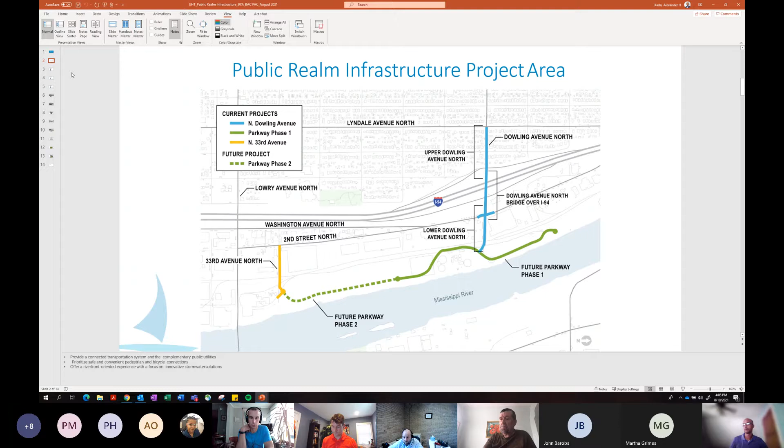We've done quite a bit of engagement. We did our first round of engagement in January 2021, and have been doing engagement on this project with CPED for a number of years, starting with the Above the Falls Master Plan. We've hosted a variety of open houses and events, and I'm sure many of you have been involved in some of those in some capacity.

To really highlight what we've heard from engagement when it comes to infrastructure, it's really just prioritizing bicycle and pedestrian movements. Obviously Dowling, getting over I-94 is quite a challenge, and so we were really tasked with how do we really accommodate non-motorist users across the bridge and then into the site. Also, we were able to work on some of the public art pieces as well, and did a lot of coordination with the forecourt around the park as well. So it's just a really exciting project.

This is just the concerns. Congestion was also an issue that was voiced by some folks, as well as bike ped safety. Just going to keep moving through to show you Upper Dowling. This is just a few more suggestions around improving art, improving the public realm, providing these more just as an FYI for folks. So we're just going to hop into Dowling.

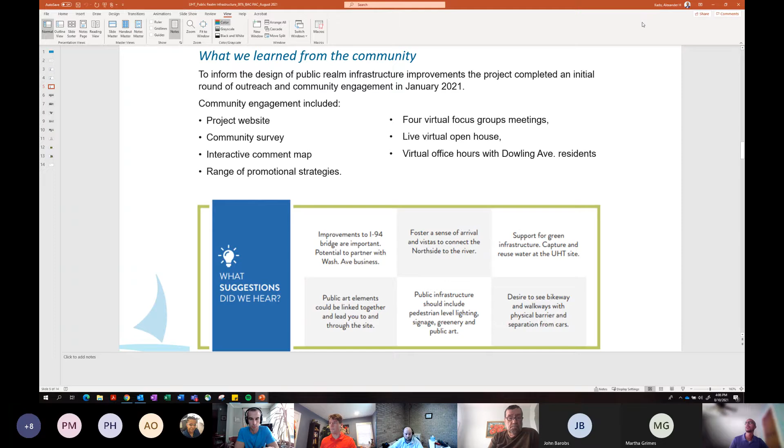So this is Upper Dowling. We call it Upper Dowling because it's at a higher elevation. This is on the western side of the bridge. You can see this is Lyndale Avenue North right here, and this is 6th Street North, right before I-94. I always get these confused, one of these is 4th and one of these is 6th, I always flip them around, so my apologies. One interesting thing to note, this was not even in the scope of the UHT project.

When Nathan and I got on board, we did some analysis and realized that, obviously Dowling being the primary access point, this area of Dowling didn't have the best pavement condition, had on-street bike lanes, no boulevard, sidewalk back to curb, so just a lot of room for improvement. So we added it to the scope for this project, and we're glad we did.

Further west of here, we're planning to put this into our CIP in future years. This treatment with the shared use path on the south side will likely extend all the way to Theodore Wirth Park. That's further along in the CIP, but the design treatment we're doing here is done with the intention of a long-term plan for how this area will look and how folks will travel to and from the site. So on the south side, we have a shared use path, 10 feet.

On the north side, we have a 6-foot sidewalk. We were really constrained with the space we had. We wanted to definitely provide separated facilities for cyclists because as of now, it's a bike lane on the street. This is a high volume street, 15,000 vehicles a day, and a bike lane on the street is just not our go-to design standard moving forward. So we went with the shared use path to facilitate those movements, understanding we still have a very constrained right of way.

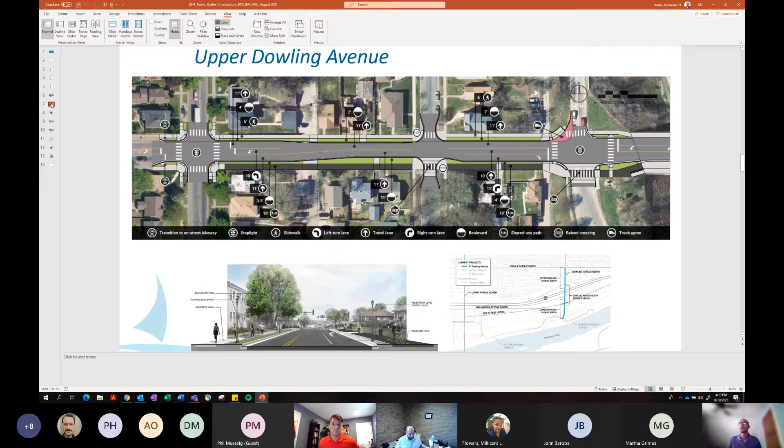And then we're going to have adjacent to that a 7-foot sidewalk that's existing, and then to the north, we'll have that 7-foot sidewalk. So this is a section where the bike and pedestrian facilities are separated because we have the space to accommodate that. This facility transition continues pretty much all the way into the site. Once we get to this intersection crossing, there's another raised crossing, some green marking for motorists, and then you'll see that continuation of the separated sidewalk and the separated two-way cycle track.

A few other things to note here. We did quite a bit of reskewing of the intersection to organize it a little better. If you've been out to that area before, you can see the vehicle lane alignments and the intersection in general is a little problematic, and the crossing distances are a little tricky. So we are realigning that intersection to aid in movement for all users: motorists, cyclists, pedestrians, etc.

We're also adding in some north and south bike facilities. These will connect into the Webber Camden 44 project further north, which I believe begins construction next year. To the south, we have the cycle facility that'll extend into 2nd Street north. I know I went really quick, so I'll give space to the rest of my team if they have any comments on this piece.

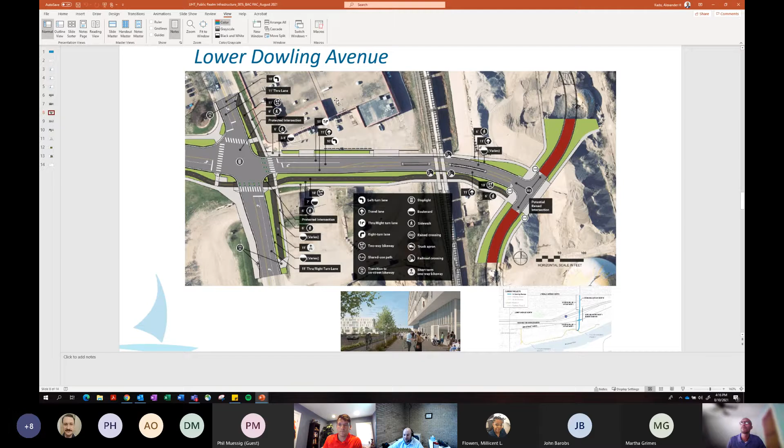Yeah, the goal with the raised intersection - you don't see it on this drawing, but envision a park on the other side of that intersection. We want to convey some design continuity into that park and show that this is all connected, make it feel more linear. The idea with the raised intersection is to make that entire area walkable and be kind of a gateway into the park - that's the design intent.

Nathan, anything else to add, or Ahmed, before I go to the next slide?

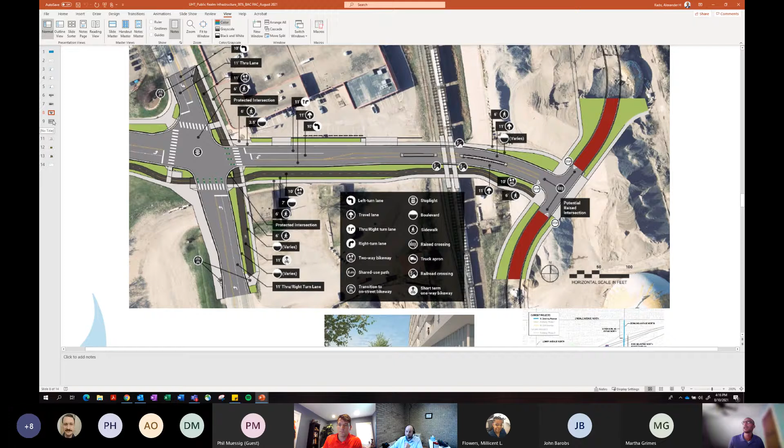Let's keep cruising through. In the packets this is actually the next slide, but I'm going to skip this one and go to the Parkway, then come back to 33rd from a logical standpoint. This is where Chris was talking about that raised intersection.

You'll see phase 1 of the UHT Parkway in red. I realize this color is a little darker than the parkways typically are, but just know that the parkway will have that red granite chip seal you're familiar with around the city. It'll travel north and end in a cul-de-sac.

This is where parcels 1A and 1B will be, that's a private development. The park will be here, the music concert venue will be here, and some of the other developments will be here as well.

You can still see the bike and ped facilities continuing north and south along the parkway. These are 10-foot travel lanes, a 10 to 12-foot two-way bike facility. There will be some parking in these little cutout sections along the parkway, in line with how the park board typically designs their parking facilities on the parkway. It's still a minimum of parking.

We do understand there's a need to provide access to all types of modes and users, but we are being respectful and trying to prioritize bikes and peds.

Along the parkway, this is a visualization, but it kind of shows you the priority. Pedestrians have the really nice views, followed by cyclists rolling along, and the motorists are a bit further away, as you see the vehicle driving there. So it really does show that prioritization of the parkway.

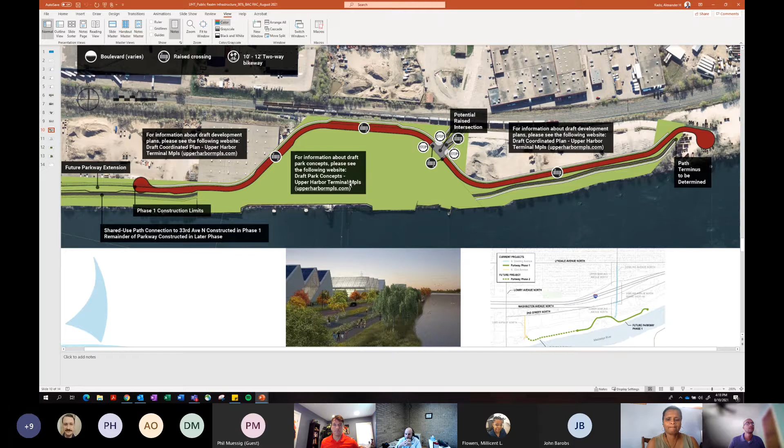I'm going to the next slide, which is 33rd Avenue. So this is 33rd Avenue.

We went to the BAC and PAC, I think it was in April, but I don't know—my perspective of time is a little foggy with this last year of COVID and whatnot. But we came to the PAC and BAC with two concepts because we were very space constrained in this area.

One concept had a wider shared use path on the north with some boulevard, but did not have a sidewalk. The BAC and PAC were pretty unanimous that a sidewalk on the south side was essentially a requirement, wanting pedestrian facilities on both sides of the road.

So we went back to the drawing board, worked things out with the design team, engaged with the stakeholders here, which are heavy to light industrial manufacturers, and were able to add in the sidewalk on the south side. The width varies, but at a minimum meets that 6-foot pedestrian path, plus a few extra feet for signage and lighting.

To the north, we do have the shared use path at 10 feet. Both of these connect into the roundabout. We have two 10-foot travel lanes and an 8-foot median. The 8-foot median is a new addition on 33rd.

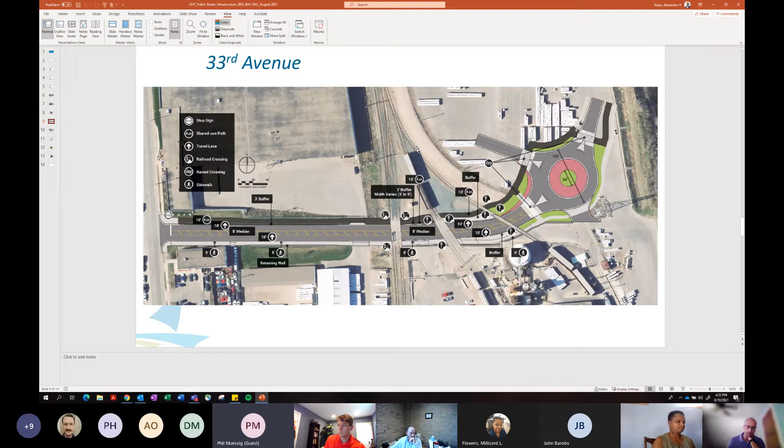I remember this is back to Upper Dowling. So it's a 10-foot shared use path on the south side of Dowling with the divider in the middle. Is that the plan?

Are you talking about Upper Dowling or the bridge, Bill? Way west of the west. Dowling as far west as the project goes over to Lyndale. Yeah, so this would be a 10-foot shared use path.

I'm not certain, Nathan, where we're at now on striping. Are we centerline striping the shared use paths, or are we just leaving them unmarked? I know there's been a bit of back and forth on what our new policy around that is. Yeah, we'd have to double check with traffic because we are looking at best practices from not only locally, but regionally and across the country for how to best design and stripe these. Currently on the Johnson project in Northeast that's being built as a shared use path, we're taking the approach of having it signed with biking and walking signage at the gateway to each block. We'd be looking at that on this project too, but just have to confirm that detail with our traffic staff. As of now, we'd be looking to have signage as compared to striping.

Oh, okay. I know there's been some discussion about just a dashed line in the middle, knowing that bicyclists obviously are going to range over across the striping, but signage, I've seen it certainly work too, definitely.

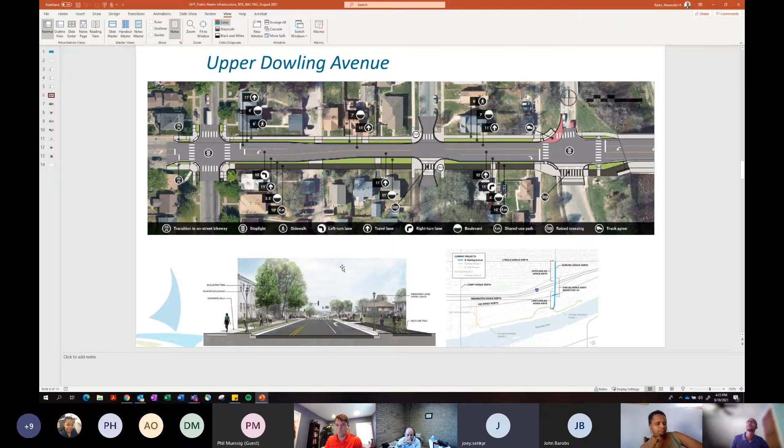Anyone else with any questions? Joey? Yeah, I had a question about Washington Avenue there, right on the east side of the 94 bridge. It looked like there is a... sorry, let me get it for a second, no problem.

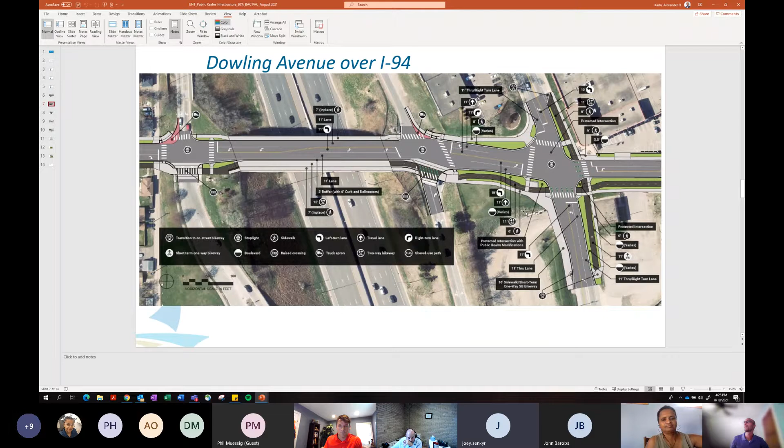So it looks like there's a two-way bike lane continuing north on Washington, and it's only separated for a little bit. Would that then be painted as a two-way, even just paint protected all the way up to where Washington crosses 94 again, or is there going to be a rough transition for southbound bikers?

The intent would be to have striping and delineators up to the Lyndale 41st intersection. We'd likely be doing a seal coat project to get rid of any lane scarring for the striping. We did do a change order with Hennepin County on the Webber 44 project. In the previous layout, they had it transitioning to directional on-street lanes at Lyndale and 41st.

But for those of you familiar with that project that went through this committee a couple of years ago, it will now stay on the west side of Lyndale at 41st as a two-way bikeway, come around the corner on the bridge and then tie into this project. So there will now be a continuous path once this project is done from Dowling, I think 9 miles, connecting all the way into Brooklyn Center. So we found this as a really great short-term win to connect more people to Upper Harbor as well as greater North Minneapolis.

That sounds great. Thank you. That is awesome. Anybody else with any questions? Okay, so guys, I'm not seeing anybody else with their hand up.

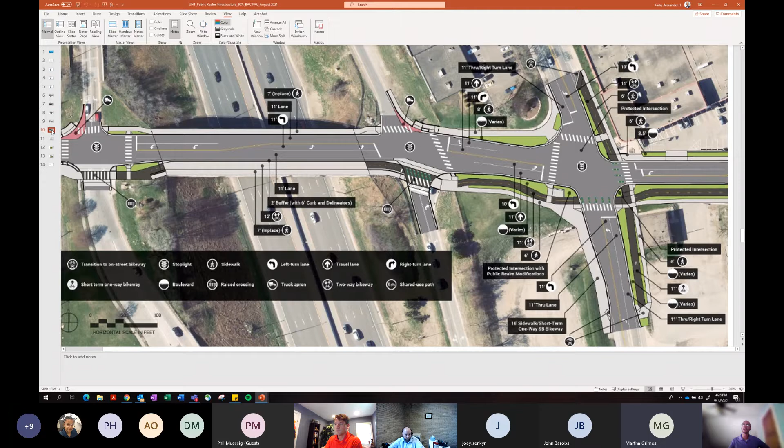So there are a lot of pieces to Upper Harbor Terminal. One of the most critical ones is the green stormwater infrastructure component. We've been designing and working around what that will be for this site, and we've done a lot of work with the Mississippi Watershed Management Organization, the Park Board, and also private development to reach a district system to help clean, treat, and potentially reuse runoff from the site.

This is a 50-acre site, and we are using the water to infiltrate into the underground before it enters the Mississippi River. Some of the water here may receive a higher level of treatment than others. We're still exploring that, but we are proposing a district system within here, which includes a variety of treatments.

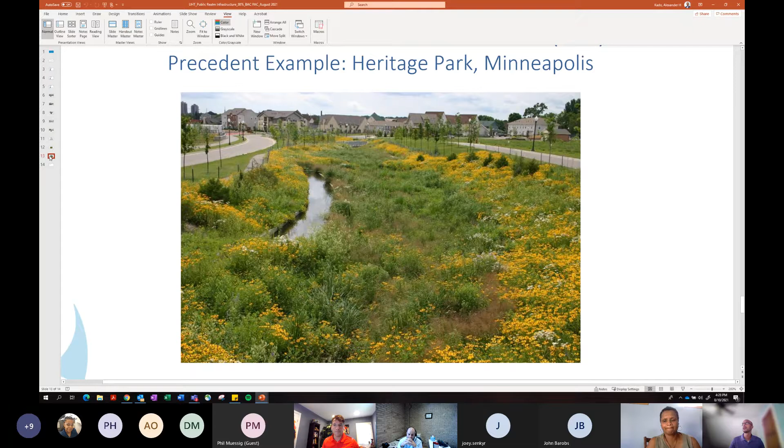From a surface level, you will likely see things more like this. This is Heritage Park in Minneapolis, on the edge of North Minneapolis. This is the Stormwater Plaza at 8th Street and Riverside Avenue. So these are the types of things that you would likely see as a visitor to the site, adjacent to the right-of-way, with a variety of different treatments.

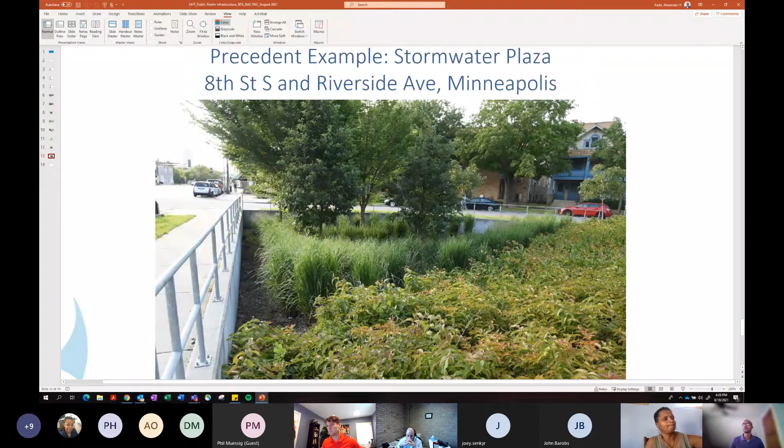So the takeaway for this group is just knowing that there's going to be a district-wide stormwater system to treat the stormwater runoff. It's still in the design stages. We've been working with MWMO, the Park Board, and private development to really deliver a really exciting system for the public.

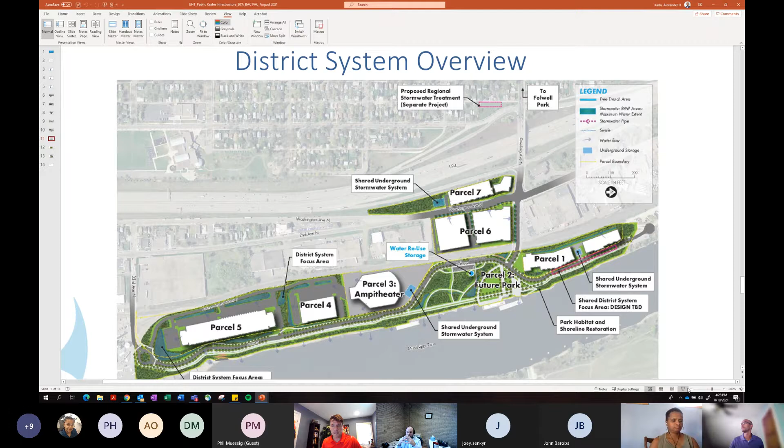So this is a really innovative public-private partnership through a combination of easements and design to more holistically treat stormwater in the area. As Alexander said, 50 acres. The only local precedent we have of something like this would be in the Towerside district over by the U of M. This is a very strong collaboration where we're able to combine private water, park board water, and city water, and better utilize the space so we can have more greening and fit more in this area.

We aim to achieve a combined goal of improved water quality when it does go into the Mississippi, and potentially using it for on-site irrigation or other things. Typically this is a pretty detailed element that follows through before construction, but we thought it was such an innovative idea that this group would be interested in understanding how that comes together for a cohesive design and aesthetic for the broader site, while advancing a lot of environmental goals that we have for Upper Harbor and the city as a whole.

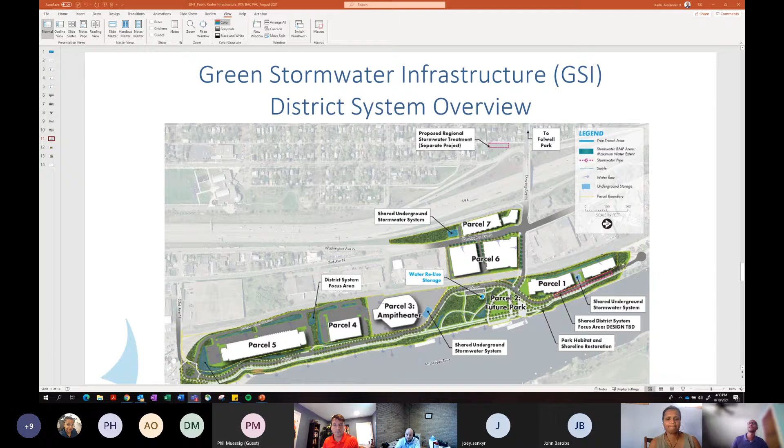To conclude, round 2 engagement is starting this month. We have an open house on August 24th, Tuesday. We're targeting layout approval in October, and construction starting in 2023. The infrastructure construction will start in 2023, and private development will likely start shortly after that and continue for the following years. So two years from now, you'll start seeing a lot of activity in that area.

So are you guys planning on coming back to talk to us again, or is this our only visit?

This is it. This is our 30%. We're going to be using our round 2 engagement and the open house to get additional feedback and incorporate any additional tweaks into the design, but we are not anticipating to return to this group unless there's significant changes.

Okay, Dan Miller? Yep, hi. Going back to the Dowling Avenue over 94 photo there, or illustration, just a question regarding MnDOT and what they're doing with 252.

I'm not sure how far they're going down, but is MnDOT involved at all with any of these improvements on Dowling? They're a project partner, but given the current timeline for the environmental review on 252/94, they haven't advanced any new bridge or design elements that would currently impact what we're planning here.

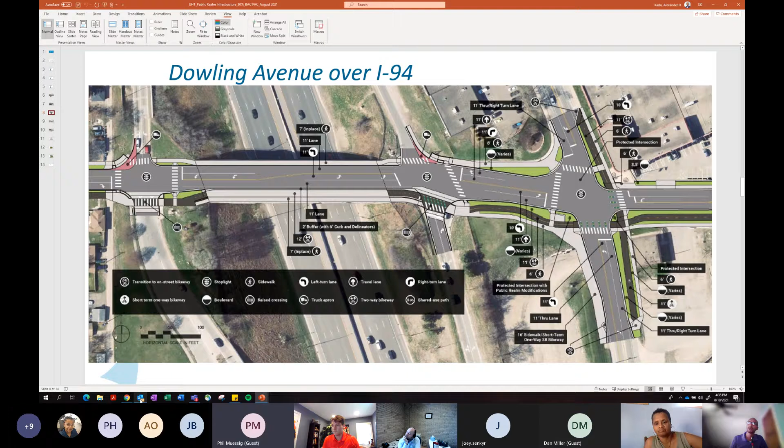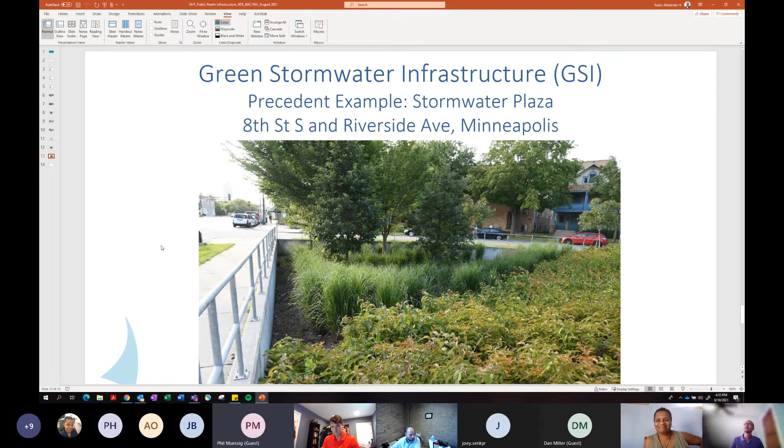Yeah, speaking of the green infrastructure work, I just wanted to compliment you all, the city, on that 8th Riverside Avenue to 8th Street storage facility for water, quite significant. It took a couple of years to really grow out. I passed it pretty much every week, and over the first two years it looked a little rangy and scruffy, and you wondered if these trees were going to live. As the picture shows, it's really come along well, and it stores a heck of a lot of water for a big rainfall, and that's one of the predictions we'll see with these larger rain events. So this was a great example, and it appears to be working well from my biking past it.

We're using a lot of those same folks that were involved in the design of that system with this situation at Upper Harbor Terminal. So we're really excited, and I'm glad you enjoyed that and are optimistic about what will happen at the UHT site.

Well, unless there's someone else, I want to thank you. Great presentation, and thank you for having the PED and the bikers involved in the planning, and the watershed is all coming together. So thank you.

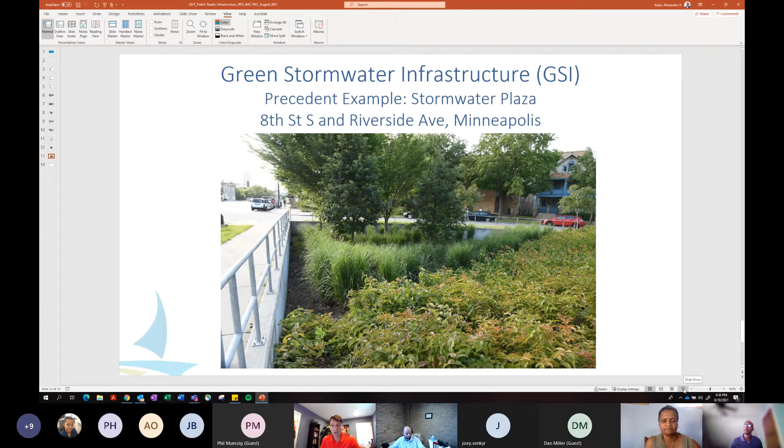Any more questions? I would just say that we are looking for layout approval in October, so it would be very helpful for our team if we got a resolution of support for the project in advance of TPW in October.

Okay, Dan, can you help me with the resolution part? Is that something we do after? Yeah, I think that's something we can draft. Is there anybody that would like to work on drafting a resolution? Say something now, or Marty and myself can start to put some stuff together for the general meeting. Okay, it looks like it's you and I. Okay, thank you, that was wonderful.

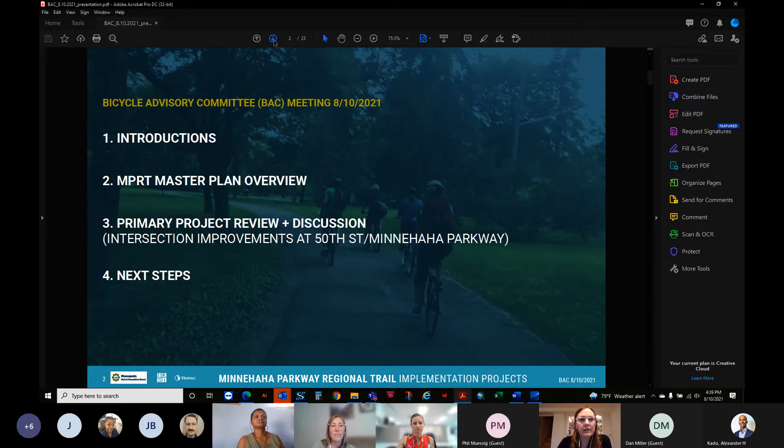Minnehaha Parkway Regional Trail underwent a master planning process beginning in 2018, and that master plan process spanned about 2 years and culminated in the adoption by the Park Board in November of 2020. We had a very robust community engagement process.

Throughout that time, we engaged with the Community Advisory Committee, had a dozen meetings with them, quite a few open houses, a number of MPRB in-houses, an interactive web survey, quite a few meetings on site in the neighborhood, and the Park Board also led quite a few outings with youth groups through the other parks in the city throughout Minnehaha Parkway.

The plan was adopted in November 2020, and right now we are in the implementation process phase. We anticipate the horizon for this master plan to be 20 to 30 years. We knew going into the master plan process that there would be some funding available at the completion of the project to do some initial projects.

And so that is what we are working on right now: identifying and scoping, and then working on the design for some of these initial projects.

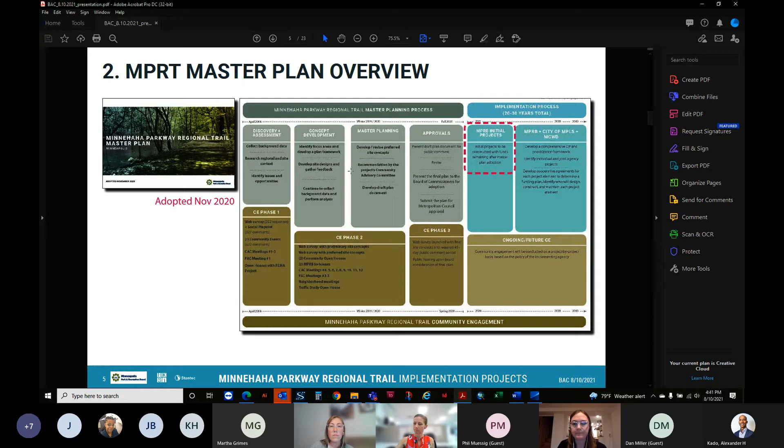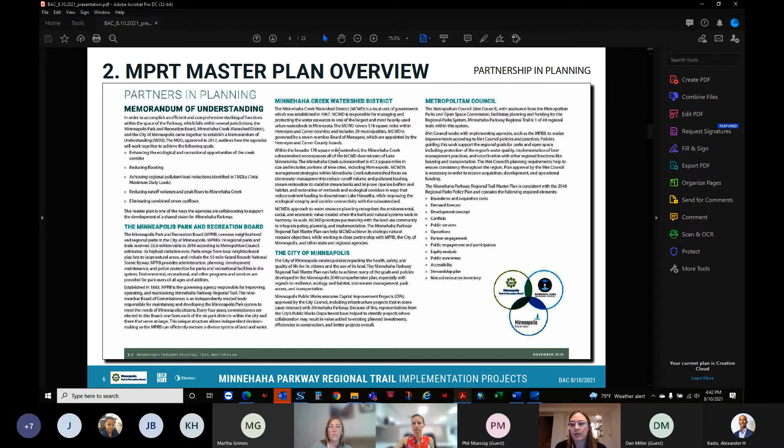With the master plan process, there were three entities that had a lot of involvement - not just the Park Board, but also the City of Minneapolis and Minnehaha Creek Watershed District. There was an MOU signed at the beginning of the project, acknowledging that the three partner organizations would be engaged throughout the planning process and through implementation, trying to identify projects that can be completed together and in cooperation with each other.

I'm sure most of you are pretty familiar with Minnehaha Parkway and the trail system. The master plan study area was divided into 4 segments so that we could organize the space a little bit and talk about it within these segments. You'll notice that the study area did not include the segment of the parkway that crosses through Hiawatha and Nokomis.

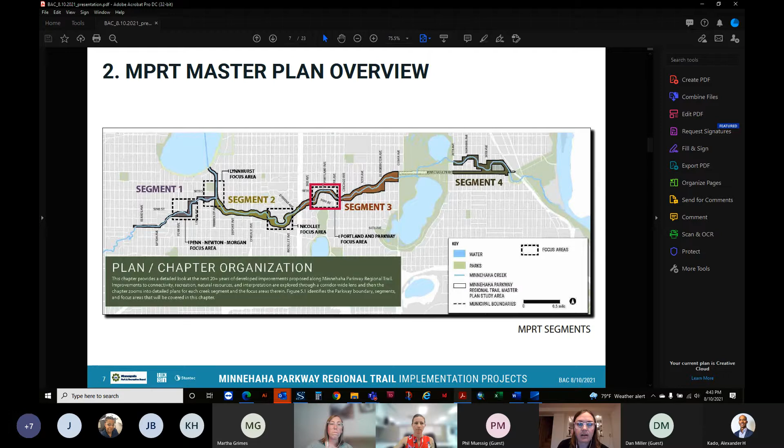This is because these parks were master planned in 2015, I believe that plan was completed. So that portion of the parkway already had recommendations, and some of those have been implemented already. Today, we're going to focus on the recommendations gathered in segment 3, around Portland Avenue, Park Avenue, and 50th Street.

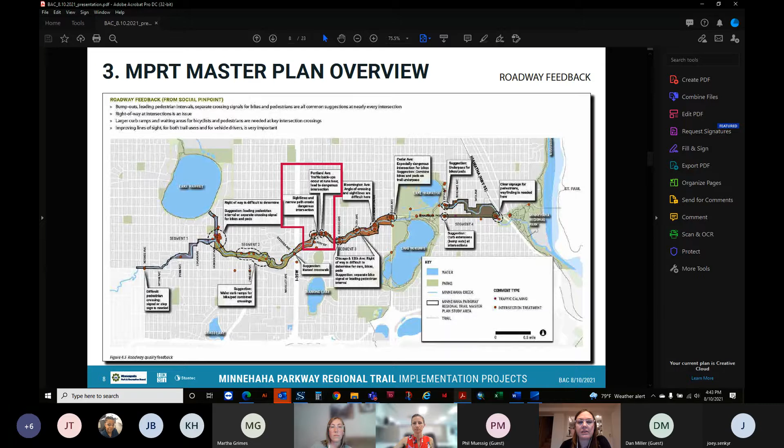About 2/3 or 3/4 of the way through the master planning process, it seemed apparent that we needed to take a little pause and address some of the issues coming up through engagement and with our CAC regarding traffic and some of the recommendations throughout the parkway. So we put a pause on the master plan process and commissioned a traffic study with Stantec in 2019.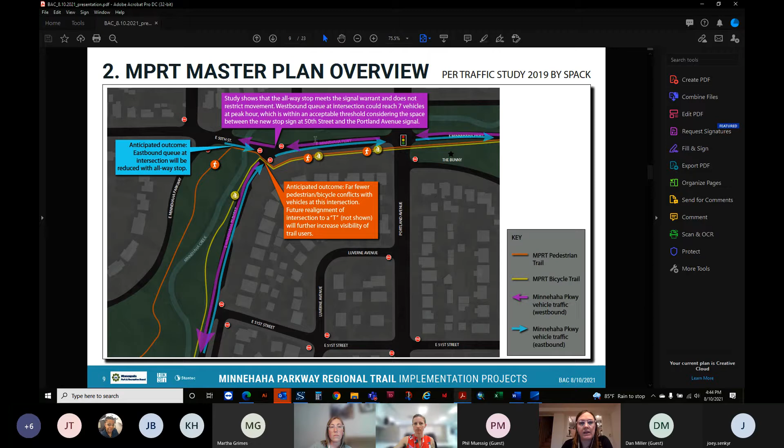This is a diagram of the master plan focus area recommendations for this area. You can see our primary project area is one of many recommendations that came out of the planning process. With the Community Advisory Committee and MPRB staff and community feedback, we identified this intersection as the highest priority.

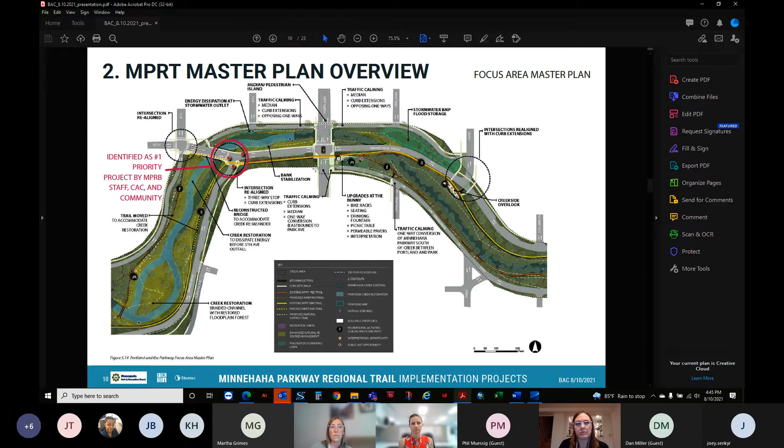For immediate implementation throughout the entire creek corridor, some other projects that might become part of this scope, depending on funding availability, include one-way conversion along the north leg of Minnehaha Parkway, potential upgrades around the bunny sculpture, and medians to restrict some turning movements around the trails.

Now I'm going to go a little more in depth with the primary project. Just a project schedule: right now we are at the 30% review with you all. We'll be meeting with the Pedestrian Advisory Committee next week, and the following week we'll be reviewing with the CPTF group with the city of Minneapolis.

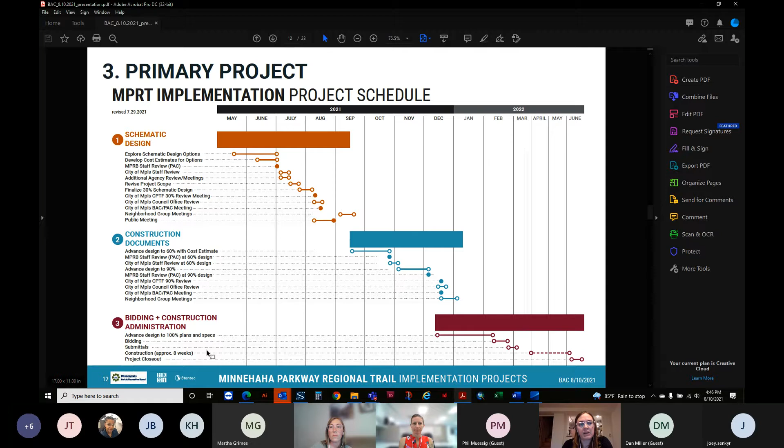We'll be doing community engagement with neighborhood groups, taking all the feedback and working on construction documents, planning to return to the Bicycle Advisory Committee at 90%. Then looking to do bidding and construction administration through 2022.

I threw in a couple slides here for reference if we need to come back to them in our discussion. This is the project area, aerial view, 50th Street, Minnehaha Parkway. This is actually mislabeled from Google, but this is also Minnehaha Parkway, and this is the north leg of Minnehaha Parkway.

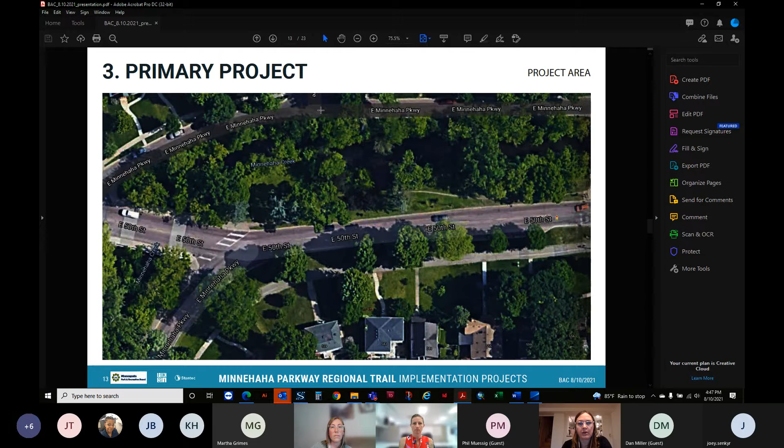Street view, you can see there's quite a bit of traffic at this intersection. There's a sign today that says 'signal your turn.' This is a pretty confusing intersection for most users—drivers, pedestrians, and bicyclists. The trail crossing is back here, and for drivers, it's not clear that they'll be crossing a trail as soon as they get past this intersection.

There are some other issues we're looking at alongside the primary project area, including erosion issues and potentially adding a sidewalk along the north side of the parkway.

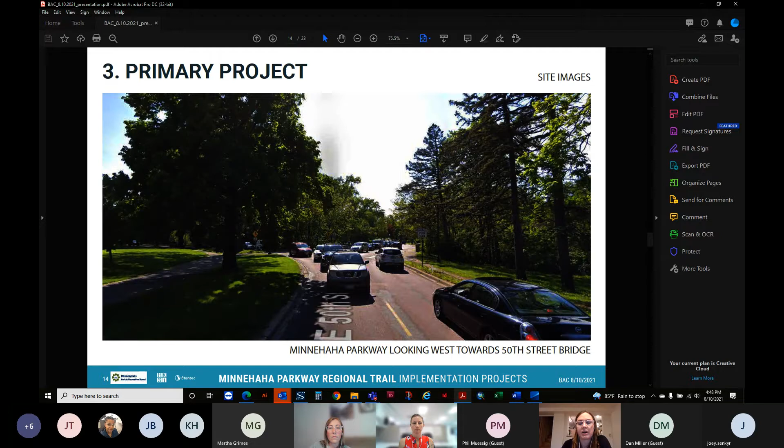Here's another view of that intersection. The shared use trail is here, then crosses the roadway, and the trail actually splits—bikers go south and pedestrians continue across the bridge and go south along the parkway on the other side of the creek.

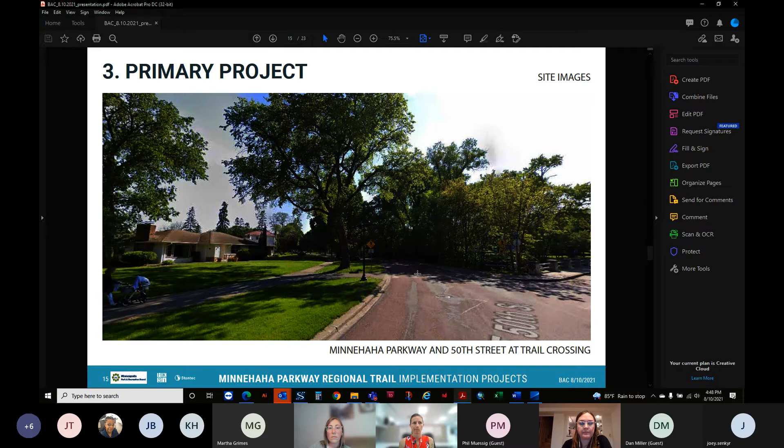Another view a little further south along Minnehaha Parkway from that intersection. You can see the bike trail is right at the back of the curb along the roadway. Some trees have made the path narrowed here and not very consistent, and there's sidewalk on the east side of the road.

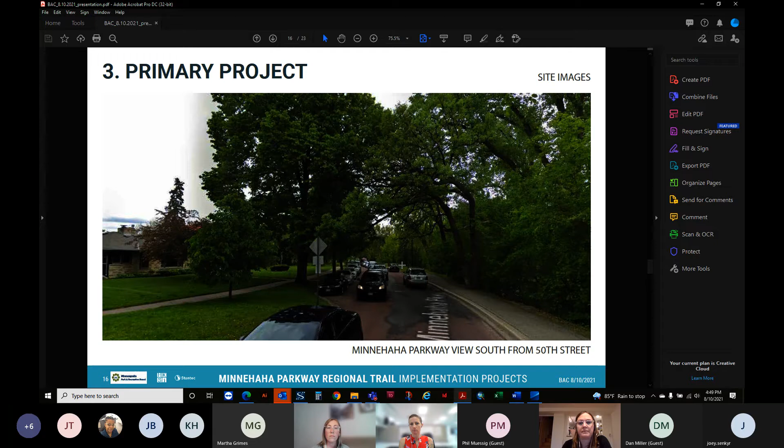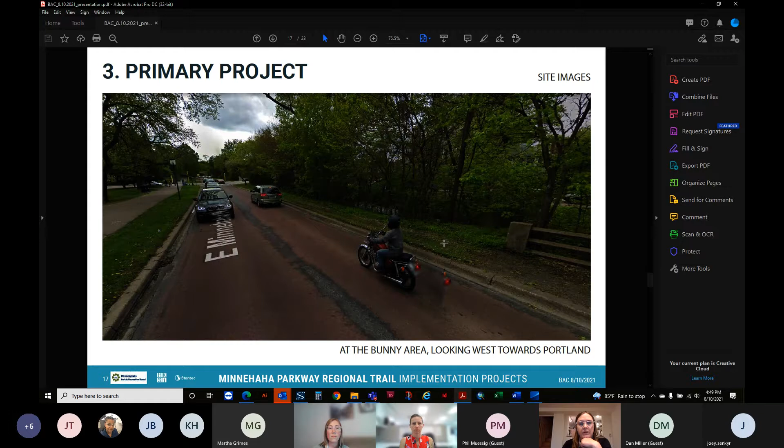One more photo, maybe for reference later, but this is a bit further east from the project area, closer to the Bunny, showing the Parkway Trail along the south side of the road, and on the north side there's kind of a goat path, but no sidewalk today.

So the primary project goals: improve visibility of trail users, improve safety of trail users at the intersection, especially at 50th and the Parkway, and address legibility of the intersection for drivers.

Some of the components we are looking at: realigning the south leg of the intersection to a T, designed for a future three-way stop controlled intersection, and expanding the pedestrian curb ramp areas at the crosswalks. We know this is one of the most heavily used trails in the park system, and maybe even in the city, with quite a bit of volume of pedestrians and bicyclists waiting at the intersection to cross.

Upgrading crosswalk markings—we want to use green and white multimodal continental style crosswalk markings. We'll also be looking at widening the trail segments to match the master plan recommendations for the parkway, increasing to a 12-foot minimum for shared use trails, 14 preferred, and a 10-foot minimum for the bicycle trail.

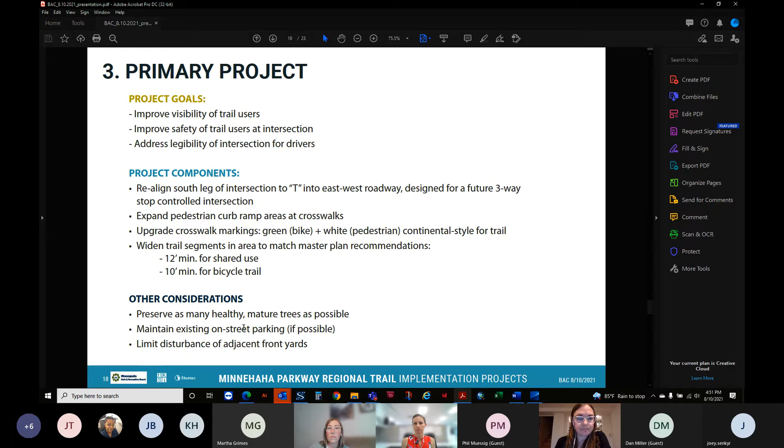Some other considerations factoring into the design: we want to preserve as many healthy, mature trees as possible, maintain existing on-street parking where we can, and limit disturbance of adjacent front yards. This is one section of Minnehaha Parkway where the trail is directly in front of people's homes. So this is the existing project area.

As you can see, the shared use trail is here and then crosses right at the curve of Minnehaha Parkway. The bicycle trail continues south. Pedestrians cross the bridge, and this is the pedestrian trail.

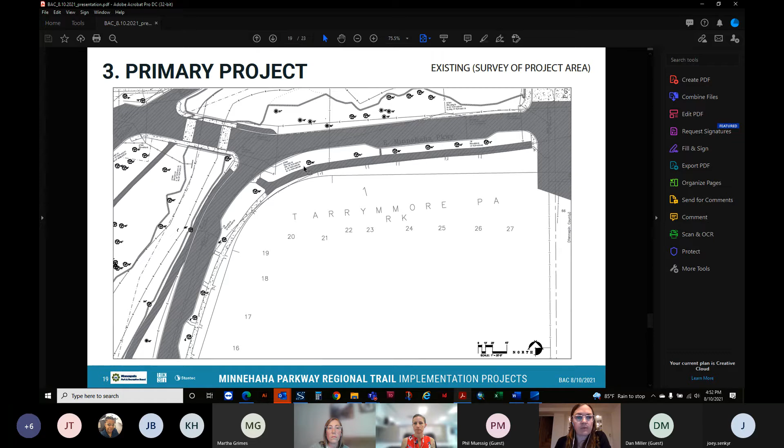The geometry today of the roadway is not conducive to communicating to drivers that they need to stop and yield for pedestrians and bicyclists at this crossing, which is the biggest design move we're looking at. So we are looking at teeing up this intersection, realigning the south leg so that it meets the intersection as close to a 90-degree angle as possible.

We are limited a little bit with the geometry because of this existing 50th Street bridge, so we're a bit constrained here. The bridge abutments start right where my cursor is, so we can't push the realignment too much further to the west. This line here is the right of way for the parkway.

We're looking at expanding those curb ramps, adding better crosswalk markings, and trying to make this trail width consistent along the shared use trail. Along with the realignment of the roadway, we're hoping to make the bike trail along the south leg also a consistent width and provide some separation from the roadway here.

Right now we're looking at constraints with the existing tree locations, trying to figure out if we can do all of this work without removing any trees. That probably isn't possible, and right now, with the assistance of MPRB staff, we're taking a closer look at some of those trees.

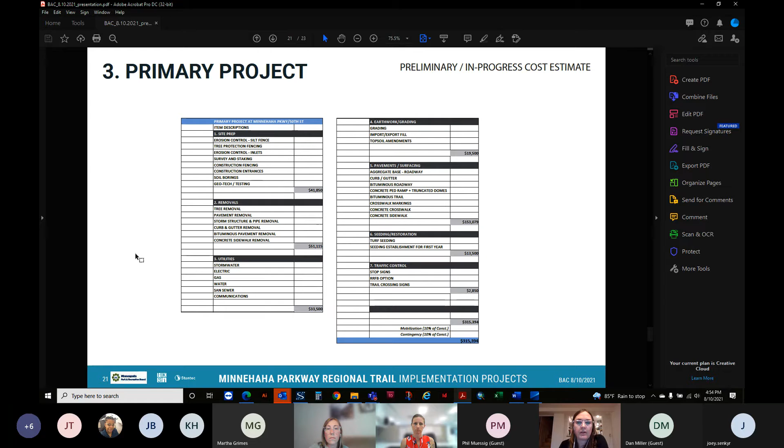I think that's most of what we're looking at in this primary project area. We are working through a preliminary cost estimate right now. As I mentioned, some of these issues—tree preservation, tree removal, trail widening, on-street parking—I think today what we'd be looking for are any recommendations or preferred facilities we should be exploring further in depth in this area.

For next steps, this meeting was actually rescheduled. The CPTF meeting will be on the 23rd. Today we're meeting with you all. The Bicycle Advisory Committee will be meeting with the Pedestrian Advisory Committee next week, and then in September we'll be working through the engagement process with the neighborhood groups.

As I mentioned earlier, there was a pretty robust engagement process to identify the project through the master planning process, identifying more specific facilities and recommendations in this area than most of the other areas within the master plan study. So we feel fairly confident in the general scope of the project as far as engagement goes, but we'll be working through informing the neighborhood groups about the details of the project in September.

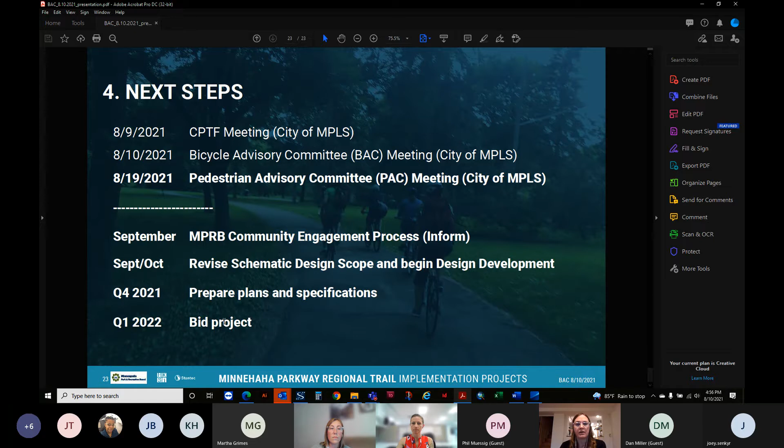We'll be revising that schematic design and scope, then working through design development later in the fall, preparing plans and specs this winter, and then looking to bid the project in spring or winter of 2022. So that is the project in a nutshell.

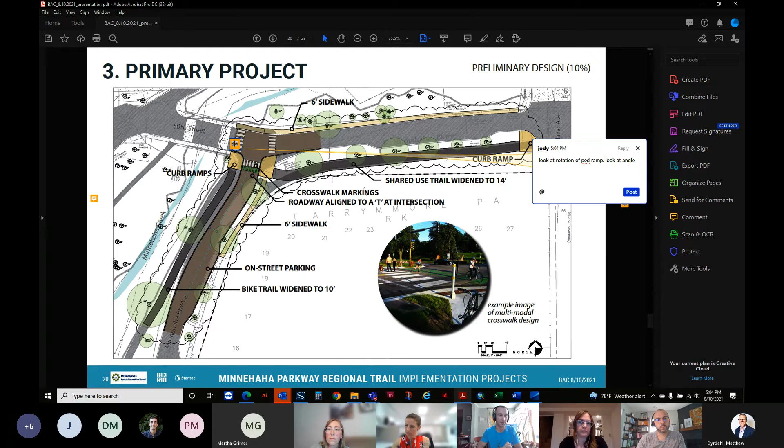So the other thing I was thinking about was at that curb ramp on the southwest corner. My first comment might negate this, but I'm trying to figure out a way to rotate that bike path intersection with the corner a bit, rather than it being a direct 90-degree angle, which could be tough for someone in motion on a bicycle. Just seeing if there's some way to get a little decrease in that angle.

But otherwise, I'm excited to see this change, because as a frequent rider, there's a lot of uncertainty when you're going to cross that street on the bike path. So it's good to see this change. Thank you, yeah, I agree.

Philip here. It's great to see these suggested improvements, because people come along at a pretty good clip, and then all of a sudden there are pedestrians, and you're wondering, should I go across the bridge or use the goat path? If you're a pedestrian, I can see why you're suggesting a sidewalk on the north side, Minnehaha, but signage and wayfinding, and probably some slowing down of bikes as they get to this intersection. Some physical cues would be really helpful, because I can remember times feeling like, whoa, I better stop, because pedestrians have stopped to look around and figure out what to do, or bicyclists with a trailer aren't sure what to do. So it is confusing. I'm almost imagining a big map, a kiosk, but it doesn't warrant that much. Signage and wayfinding will be part of the visual cues.

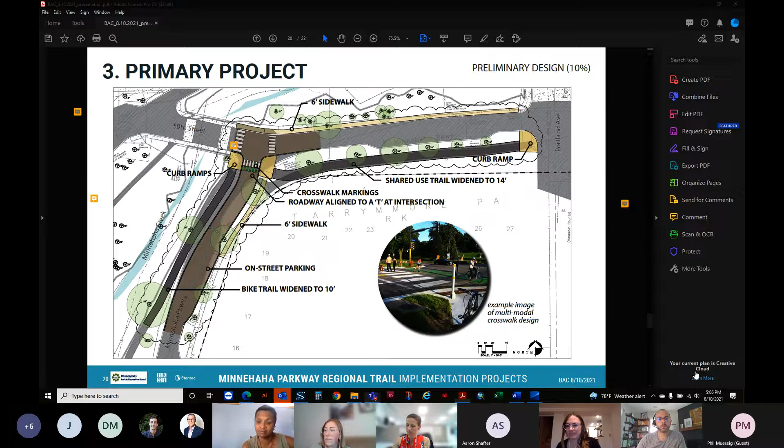Hello everyone, my name is Amber Blanchard. I'm the project director for the Stone Arch Repair Project with MnDOT Metro District. So let me get the presentation going. Can you all hear me okay? Yes. Awesome, thanks for the head nod, Jesse.

All right, I've got a short presentation here covering the repair plans for this. We're meeting with you all today, and then next week we're meeting with the Pedestrian Advisory Committee. So let me just get into this.

So we've got a great project team working on this, with several offices and people representing MnDOT, including the Metro District, the Cultural Resource Unit here at MnDOT since the bridge is historic, the Bridge Office, and an architectural historian through MacDonald and Mack Architects included in our project team. The Bridge Engineer is LHB Incorporated, based out of Duluth, and they've done a lot of bridge repair work and design for MnDOT over the years.

The work types on this repair project include full repointing of the masonry and mortar on the structure, covering the entire bridge, all faces and underneath the arch spans as well. We're going to be doing some repairs to the minor stone cracking we're seeing in some locations, and we are going to replace severely deteriorated stone. It's not that much in the full context of the entire bridge, but a small percentage has deteriorated quite a bit that we will be looking to replace.

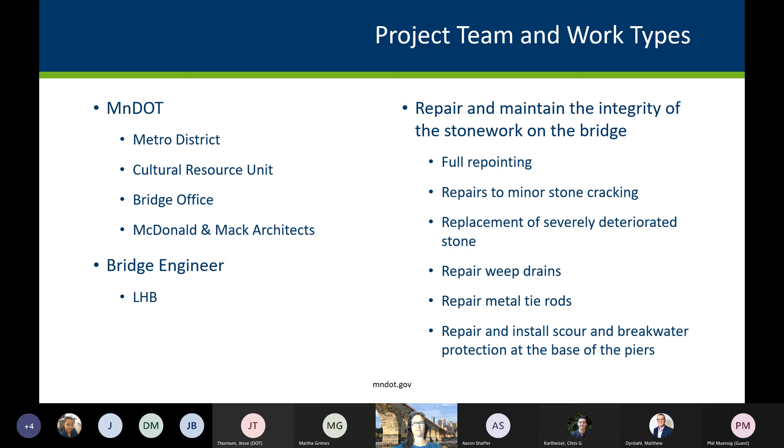We're going to be repairing the weep drains, the drains that come out of the side of the structure, as a lot of those have deteriorated as well. The metal tie rods, we're going to repair some of those and clean them up and restore them, at least on the outside. We're also going to repair and install a scour monitoring system and some pier protection at the base of the piers. So we have a lot of repair work throughout the entire bridge, but most of it is going to be the full repointing and stone replacement.

So what I'm here today to talk about and get feedback on is access and staging. You all know this is a really unique area, between the two locks and the horseshoe dam as well. Access is an issue, and we want to make sure our contractor has the best, most cost-effective options. So with that, we're recommending staging half at a time.

A couple of reasons for this: the east side will be done in concurrence with the park board's project at Father Hennepin Park. They're doing construction at the same time our bridge is under construction, so we thought the timing would be really good. The city also has public works projects this fall and next for sewer lines and storm sewer on the west bank at the same time, so we wanted to make sure we had enough access for that work underneath the bridge, and to coordinate the closure for construction of Father Hennepin Park on the east side.

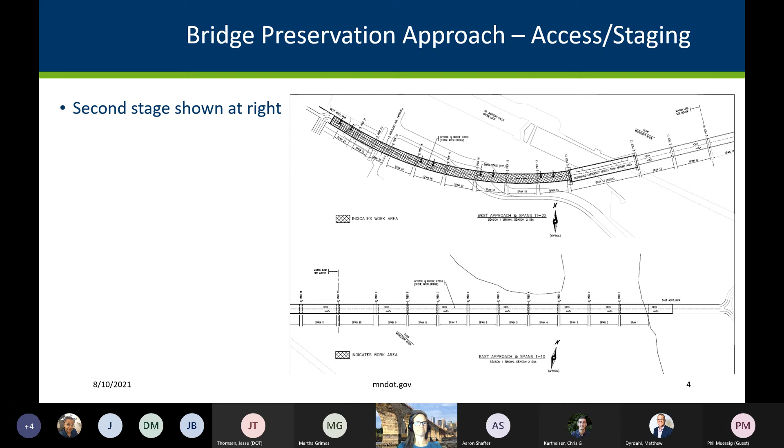We did have 30% plans and special provisions that were provided in June, so that is complete. In September, we'll have the 60% plans and special provisions as a deliverable for review. In addition, after Labor Day, sometime in the beginning or middle of September, we're going to be doing the same type of presentation to the neighborhood groups, letting them know about the access and staging scenario I just presented.

And get some feedback from them on that scenario. Then in December, we have our Section 106 consulting party meeting again, as well as our 90% plan deliverable. And then in February, we will be submitting all the project information to get ready for bid to get the contractor on board.

We have a more lengthy ad time because we're doing a special best value or pre-qualification of our contractors, since we don't normally do masonry structure repair all the time. So we want to make sure we get the right contractor to do the work well. We are going to then receive bids from contractors on August 10th. We're actually exactly a year away from receiving those bids.